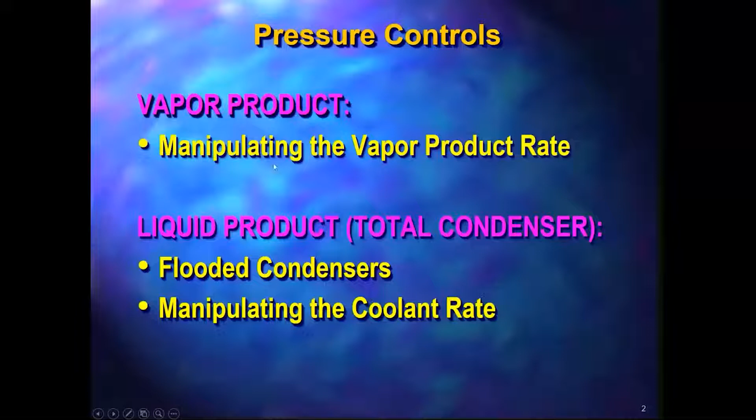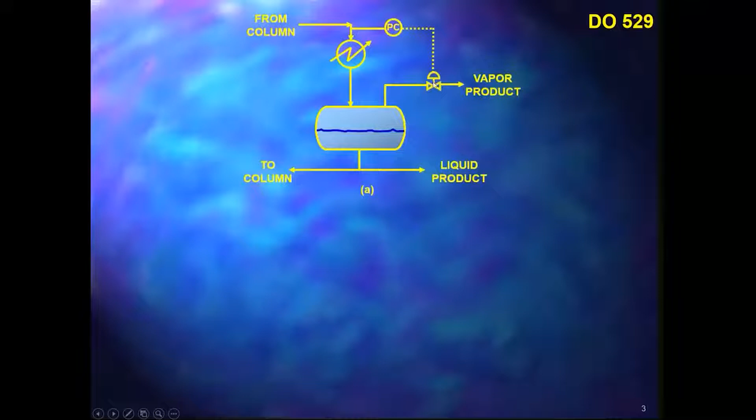Here's the simplest method. What you do is you have a control valve in the vapor product rate. Now, if you want more pressure in the column, you close that valve. When you close that valve, you keep a lot of the vapor in the column, and when you keep more vapor in the column, its pressure goes up. Conversely, if you want to reduce the pressure in the column, you open the valve that lets some of the vapor out, and the column pressure goes down.

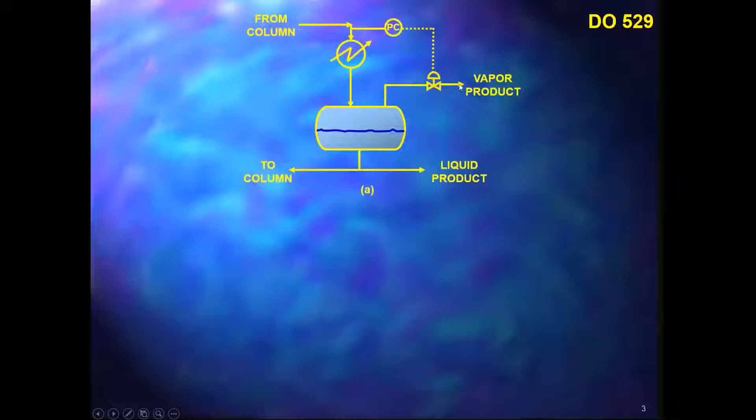Now, this method is suitable for pressure columns, for vacuum columns, especially if you've got a vacuum pump. Now, if you've got an ejector with a vacuum tower, very often we use an alternative, which instead of manipulating the vapor product rate, manipulates the spillback around the ejector.

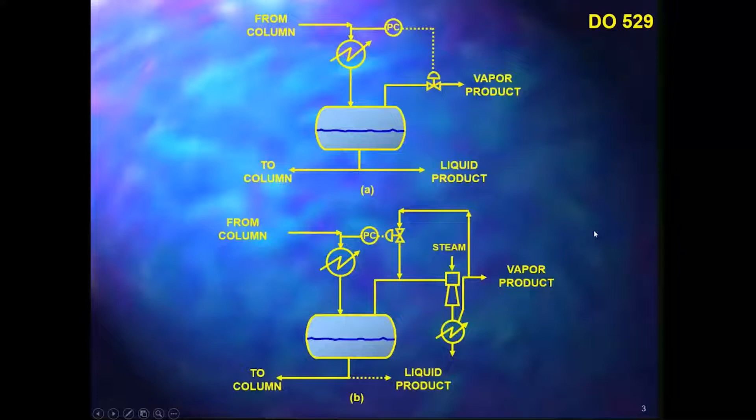Now, in many of our columns, the main product is liquid, but you still have a small amount of vapor vent stream coming out of the column. As long as you've got that vapor vent stream, you still control the pressure on the vapor vent stream. But in case you don't have enough vent gases, you can supplement it using nitrogen or fuel gas or some other inert gas that you put into the system. Now, all these three methods are good, fast, effective control methods as long as they are piped properly.

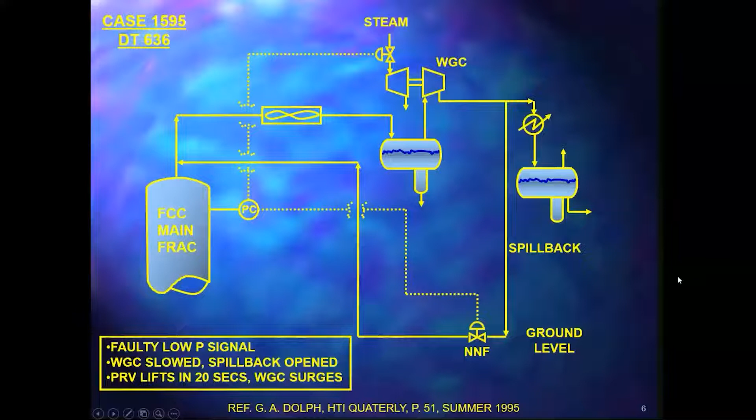Okay, so we're going to move to liquid products. And as we said, there's two main methods that we use when you've got liquid products, and one of them is the flooded condenser. And let me talk about that first.

Now, incidentally, you see a lot of page numbers out there. These page numbers refer to a couple of my books. DO stands for Distillation Operation. So if you want to read more about that, you will find it in Distillation Operation on page 530. Sometimes you see DT, the T stands for troubleshooting. That's another book, Distillation Troubleshooting, and the page number tells you where to look it up. In addition to that, when it comes to flooded condensers, there's an article that we wrote right on flooded condensers, and this article is referred to at the bottom out here.

Okay, now there's a lot of variations of this flooded condenser control scheme. And I'm going to start off with probably the most common variation, and the one that is really the basic variation. Now, what we do in this case is we insert a control valve in the condensate line from the condenser to the drum. And what we do is we keep a liquid level inside of that condenser. We flood some of the condenser area.

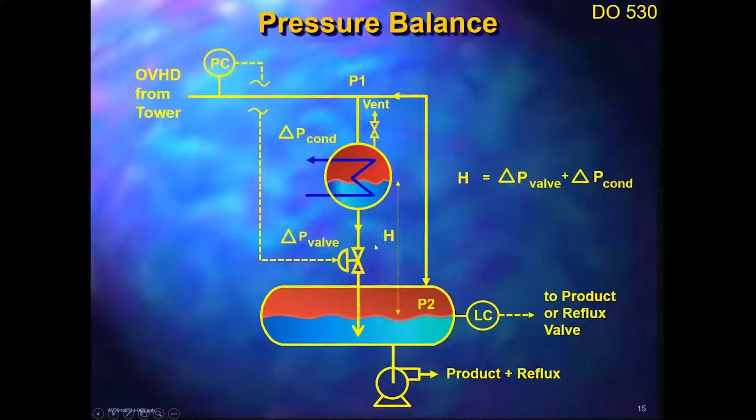Now, that means that if you've got a high pressure drop in the condenser, you may not have enough head to push the liquid down, which will bottleneck your capacity. Okay, to overcome that, what people do is they put a valve in here. And so now that gives you a bit more pressure drop that you can play with, and it essentially helps the liquid head that you've got out here.

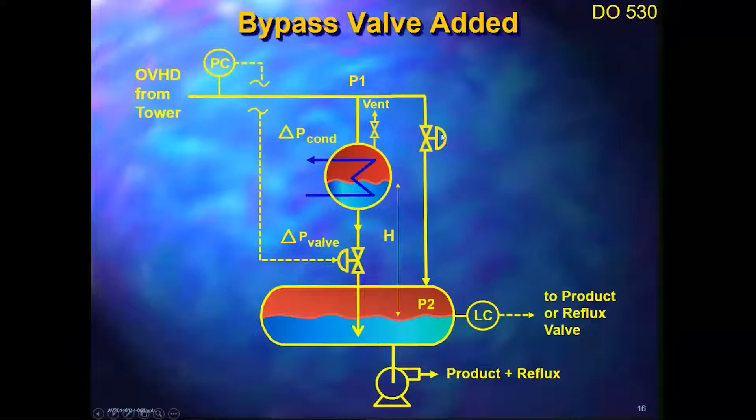Only question is, how are you going to control that valve? And conventional wisdom is to use a DP. And you'll see, usually they put a DP out there. Okay, only one problem with that. Those of you that follow the literature on the subject could have seen a paper that came out about 12 years ago by one of the experts in the field, a guy called Zach Friedman.

And what Friedman is saying is that he's seen this method more than 100 times and he's never seen it work. And he's got a good argument why it doesn't work too. He says basically the pressure control and the DPC fight each other. Okay, let's see why. Let's say the pressure in the column rises and you try to reduce it. What it will try to do here is open the valve, right? Open the valve to give you more condensation area and generate a flow downwards through that line.

Now, also when the pressure goes up, the DP goes up. And to reduce the DP, what will it do? Open this valve and send more vapor out here, which will go backwards through there and fight the first control action. Now, Friedman presents three solutions to that. The first two I'm not too excited about, but the third one is actually quite a good one. And I'll mention that in a minute.

Okay, but anyway, he says that he's never seen it work. Well, I can't say that I've seen it 100 times. I've seen it maybe 10 or 20 times. And most of the time it did work. But I thought, okay, I'll take seriously what he's saying. And I thought, hey, I've got people coming to my classes. Ask them the question, do you have this control system? And if they said yes, does it work?

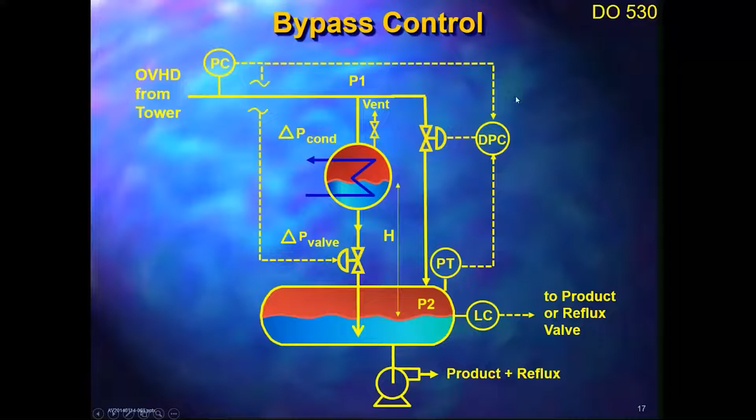One more aspect: in many of these systems, some of what condenses is water, usually a small amount, and you don't want to reflux the water back into the column because it can cause corrosion. To handle that, you include a device called a boot. The idea is that the boot collects the water that flows on the floor, runs it out, and you've got a control valve to take the water out.

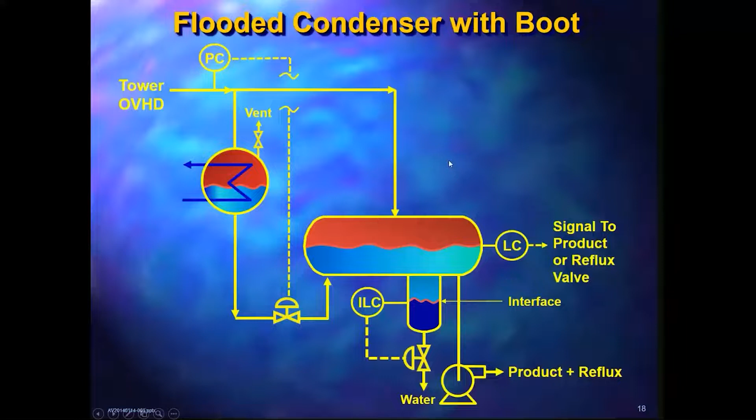Moving on. In many systems, instead of having the valve in the condensate line as shown in the last few slides, they put the control valve on the vapor line to the condenser. This is something many of the major licensors like to do, and very often they use that control system. From a control point of view, it's a beautiful control system. It actually augments the control action we took by flooding the condenser, through another mechanism: adjusting the condensing pressure out here.

If you want more pressure in the column, that means you want to condense less. To condense less, you can close the valve. Closing the valve raises the liquid level there, which helps you. But also, closing the valve reduces the condensation pressure, which reduces the condensation temperature, which reduces the delta T. So that's an additional effect. In a condenser, these two mechanisms work together. In a reboiler, not so much - they might tend to fight each other. But in a condenser, they don't; they tend to augment each other quite nicely.

Another advantage is that by condensing at a lower pressure out here, you also reduce subcooling, which is sometimes desirable, especially if there are NPSH problems in the pump. In other cases, subcooling is not desirable, and if it's not desirable, that system again offers some benefits.

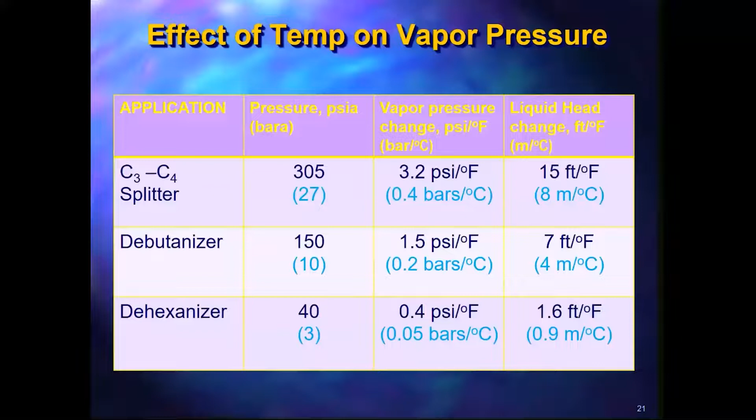So really, now forget about the bypass for a minute. Let's say there's no bypass. So this liquid in the condenser, the surface here, is at the condensing temperature, the vapor condensing temperature. But the liquid here is subcooled, so the vapor pressure in the drum is that of the subcooled liquid.

And that means it can push it up 280 feet. You can put the drum that far high in the air. And if the drum is only 15 feet above you, it will push the liquid right to the top. And we don't want to do that.

But to avoid that, what we do is we bleed some hot vapor. And that hot vapor heats up the surface. Now, the vapor pressure in the drum does not care what happens in the bulk liquid. It cares about what happens in the surface. And as long as you keep the surface hot, or fairly warm, then you can do whatever lifting you want. And that's the idea.

And so what we do is we manipulate the amount of hot vapor to essentially control the level of liquid in that exchanger.

Okay, so this is a flooded condenser method, just like all the others. Again, if you want more pressure in the column, the whole idea is you need to increase that liquid level there, right? Increase the liquid level. To increase the liquid level there, you open the valve, sends more hot vapor, which heats up the surface. It heats up the surface, then the vapor pressure of that liquid goes up, the pressure in the drum goes up, and it sends liquid to the condenser.

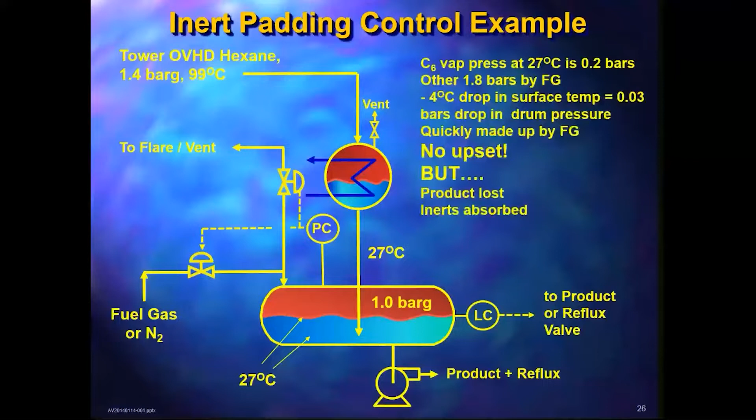I think we've had enough of these flooded condensers, so I want to skip a couple of slides and get into the coolant variation.

Here's one more method, in which we vary the coolant rate. In this case, we've got the pressure control controlling the cooling water. From a control point of view, it works nicely and is pretty straightforward. You want more pressure in the column, you reduce the cooling water. Want less pressure, you increase the cooling water.

Okay, three problems with it. Number one, the minute you close that valve, you reduce the velocity in the cooling water tubes, which gives you accelerated fouling and accelerated corrosion. Number two, when you close that valve, you increase the outlet temperature in the cooling water, which again increases your fouling and increases your corrosion. And number three, control valves used in cooling water are usually butterflies, which are very often oversized, so you end up controlling between 5% and 7% open. Okay, but other than that, it's good.

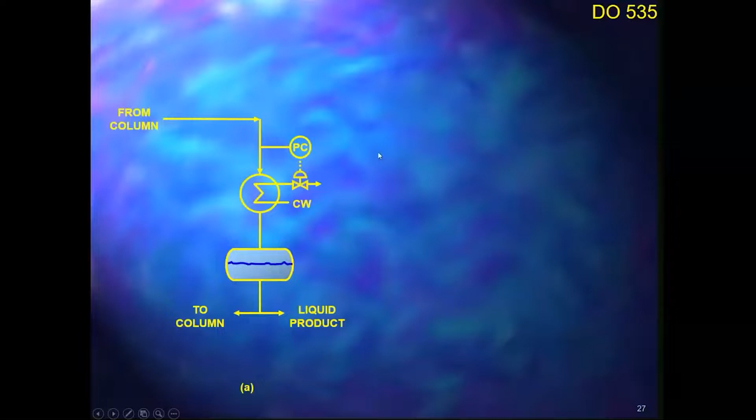But sometimes you might say, okay, this is our last choice, we don't want to use that. Sometimes you don't have a choice, sometimes you've got to use it — not so much for pressure control, but for temperature control.

We already mentioned the situation where the main product is liquid, and there's also a bit of vent gas out there. Normally we can just have the cooling water going flat out, but there are situations where we cannot. For example, in an ethanol column, they had ethanol as the liquid product and were also venting some carbon dioxide. If the temperature gets too cold, the carbon dioxide gets absorbed into the ethanol, making it off spec, so you need to keep the temperature warmer. But you don't want it too warm either, because then ethanol goes into the vent gas. So you really need to do temperature control.

The only problem is you run out of levers to pull — the only lever you've got available is that, and that's why you need to do it. As I said, not so much for pressure control, but mainly for temperature control.

That can generate another problem, which I want to demonstrate with the next case. This one was published a long time ago. The unique thing about it is the column overhead temperature was 120 degrees C. The drum was vented into an atmospheric header, so really it was pressure control without a valve, because it was riding on the pressure in the vent header — essentially that's the pressure control there.

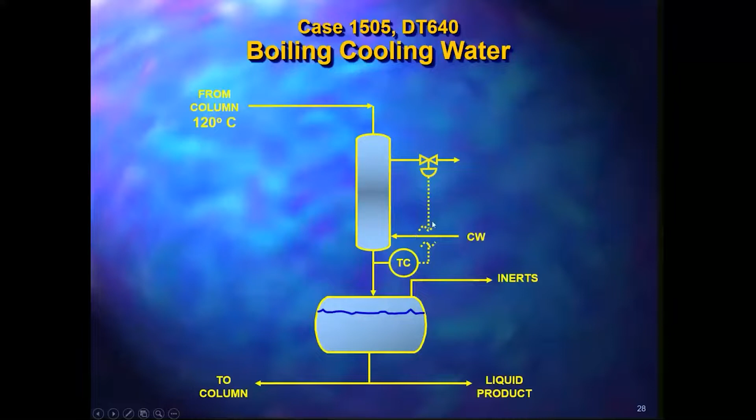Okay. Now, if you've got an air cooler, life is a lot easier. Because out here you can control the pressure or the temperature, and again, more for temperature than pressure, by the speed of the motor if you've got a variable speed fan, or the pitch of the blades otherwise. And these are good and effective methods, except they might get a bit of a bump every time you get a thunderstorm or something like that, but people live with it.

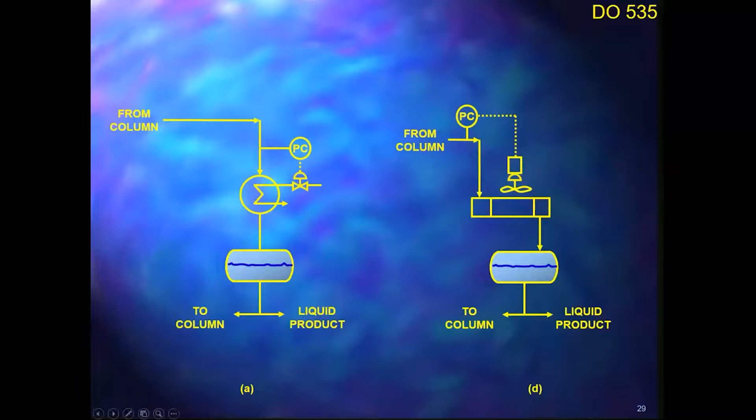If you've got refrigeration, changing the coolant is the standard way of doing it. Now, in this case, you essentially control the refrigerant level in that kettle. So if you want to get more pressure, you lower the level of refrigerant in the kettle, which cuts back on the refrigerant flow. And as a result, you get less condensation.

If you want to condense more, in other words, to lower the pressure in the column, you open the valve, raise the level, more refrigerant, and the pressure goes down. Again, very straightforward, a bit slow, but energy efficient. And because of that, whenever you see refrigerated columns, almost always you use this method.

Okay, and one more method I do want to mention. Now, back to the cooling water. One thing with the cooling water we mentioned before is that the low velocities cause the fouling and the corrosion. And that is a bigger factor than the warmer temperatures. And one way of overcoming that is by using a booster pump, just like that.

Okay, so what happens is you recycle some of the cooling water back into the exchangers. You always keep the velocities up high. And this is kind of nice. And now there's lots of variations of this method. The one I'm showing here is my favorite and became my favorite after I was taught that by a gentleman called Richardson, who used to be the control expert for Union Carbide in the old days when we had Union Carbide.

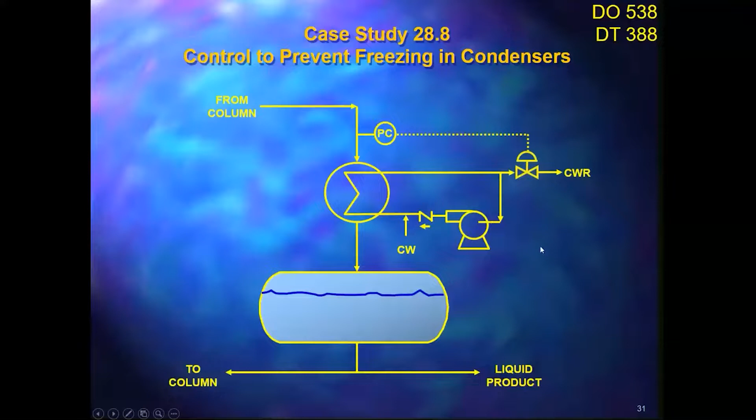Okay, one more method here. Now, until now, we talked about keeping a tight pressure control in the column. We said how important it is. For the very last slide, I'm going to turn the tables. I'm going to talk about floating pressure. Why would somebody want to float the pressure? And the reason for that is that a lot of the time, what really determines the pressure in the column is the air or the cooling water.

Well, the air and the cooling water are hot during summer, but they're cold during wintertime. So during wintertime, you can operate at a lower pressure. If you can operate at a lower pressure, you can reduce your reflux, your reboil, you got better volatility. And that's a big optimizer. Okay. And so a lot of people do it manually. The operators do it. What happens during winter? They run the column at lower pressure than during summertime, and that's it.

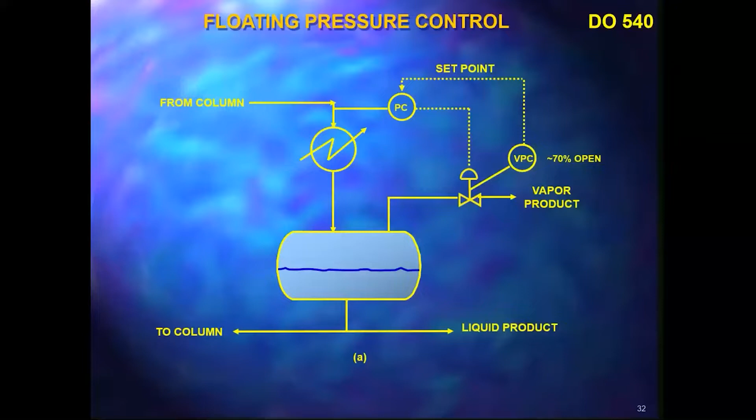So for our first question, back in one of the very first examples you had, Henry, there was a question about the control valve at grade. And so the question is, would tracing the line provide any benefit, or do you have to move the valve? Benefit, definitely. But it's going to be a shortcut solution, just like any other shortcuts. If you get some entrainment out there, it's not going to do you any good. But from atmospheric condensation, yes, it's going to help you against that. So it's definitely going to give you some benefit.

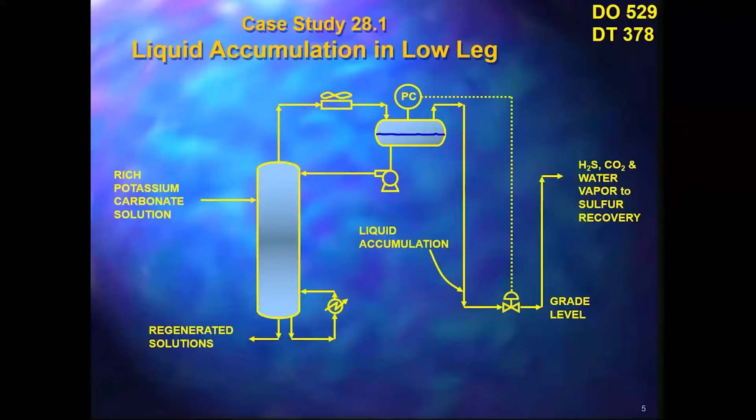There's other shortcut solutions. You can have a pumping trap out there or something like that. But obviously, the best thing, what we would definitely recommend, is to put the valve up high. But as I said, when we talk about this method out here, this one's a bit more difficult. You talk about big lines because they're using these big lines also for startup and stuff like that. So these are big lines, and sometimes you really have to have them at grade. Tracing might not be good enough for that. But the pumping trap and the steam trapping of that is definitely a good idea in this case.

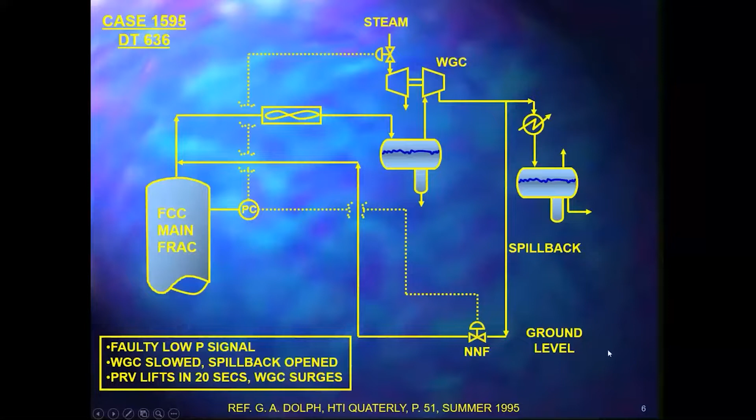Thank you, Henry. So next, we had a question. Can you comment on good practices for startup of a flooded condenser? Well, again, it depends on the system. I have not seen the startup of a flooded condenser to be a problem at any time. Initially, you just generate a little bit of liquid out there, get the level up in the drum, and once you get the level up in the drum, the whole thing is going to start working.

The one thing is, as long as you don't run into too much subcooling. You might want to cut back on cooling during that startup to make sure that you don't get too much subcooling out there. But as long as you configure it the right way, that should not be much of an issue. The other thing, if you are concerned, fill the drum up with liquid to start off with, and then you've got that line sealed. Once the line is sealed, then you don't have to worry about the very rapid condensation that can happen otherwise.

Thank you. For a flooded drum, can you not include an equalization line to the condenser and use it as a continuous vent system for non-condensables separated in the liquid-full drum? Run it by me again. For a flooded drum, yes. Can you not include an equalization line to the condenser? And there's no equalization line in that case. You do not need one. Okay, but could you include it then? Could you include it? Yeah.

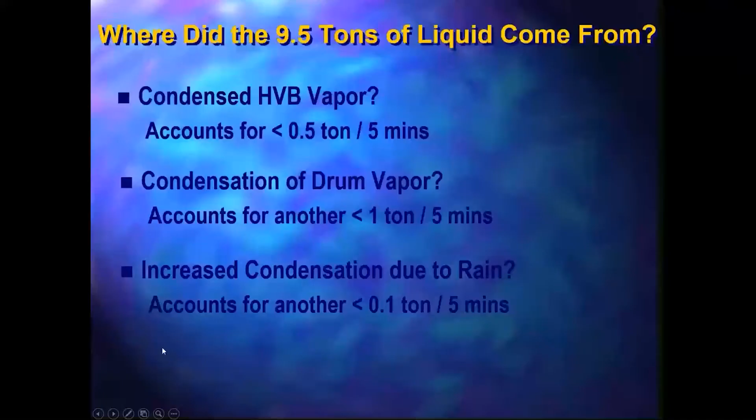If you look at my paper on flooded condensers, you'll find the reference to a paper by Mani. And really, if you want to talk about flooded drums and get a good understanding of the hydraulics, take a look at it, because there's a lot of complicated hydraulics in that. So before you do any kind of lines out there, take a close look at Mani's papers. M-A-N-I, that's the way he spells his name. It really was a classic. Well, thank you, Henry. Okay. I think they will do so.

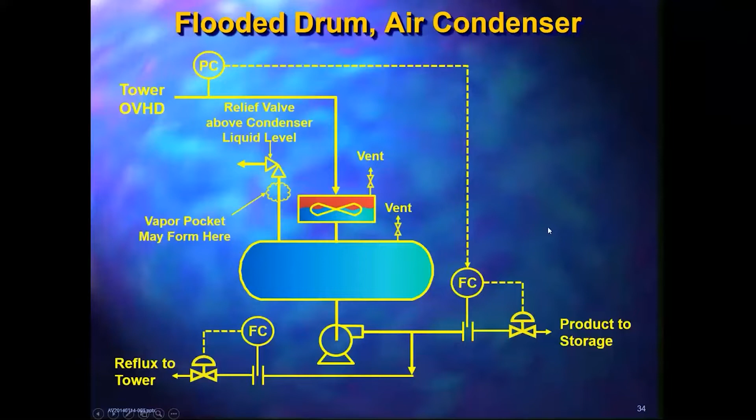Thank you. So what are your thoughts about annotating PFDs with no pockets or self-draining as opposed to waiting until P&IDs are done? Absolutely necessary. Let me tell you a little anecdote here.

You know, believe it or not, remember when I told you that system is a big no-no? I've designed a system like that. That was before I joined Fluor, but it's nothing to do with the engineering contractor that I worked with. It was something to do with me. I take full responsibility. And in fact, well, I didn't design it like that. I designed it like this, right? But not exactly. I didn't have all this. I didn't have that valve. But essentially, I designed that.

The liquid was going to the liquid. The vapor was going to the vapor. I did the PFD on that one. I did the P&ID. At that time I was a process engineer with some background in distillation. It was a naphtha splitter. And we finished, then the client came, reviewed, everything was okay. They made a few changes and we just went ahead.

And the next time I hear about it was a year later from the field. Hey, we can't keep a steady pressure in the column. I traveled to the field, take one look at it, and say, wait a minute, that's not how I designed it. What happened? Well, very often in engineering companies, the process engineers will do the P&IDs, and then the client reviews it. Once we pass the review, that goes to the pipers. And then the pipers do it their way.

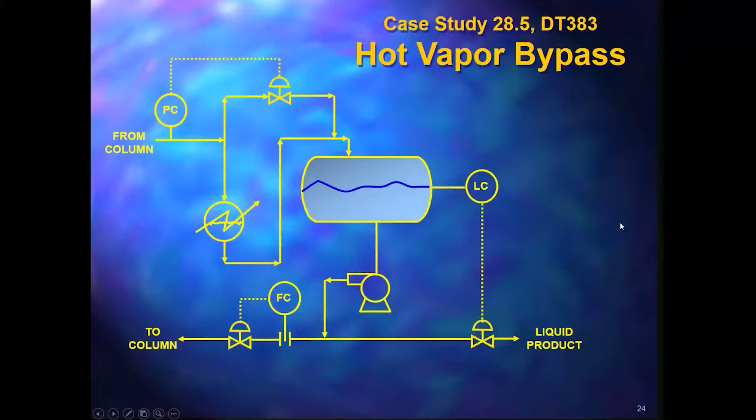Okay. For the condensers at grade, the hot vapor bypass, which was slide 24. Could you comment on an appropriate sizing basis for the rate through the hot vapor bypass valve? Yeah. The way to size that valve is consider how much vapor you need on a cold winter's day, because the biggest heat sink you've got is the subcooling, but even more so the ambient conditions. People don't like to insulate these drums because of external corrosion concerns. If the drum is insulated, that's really nice. But if not, think cold, rainy day in winter. At that time, you're going to get as much condensation as you're going to get.

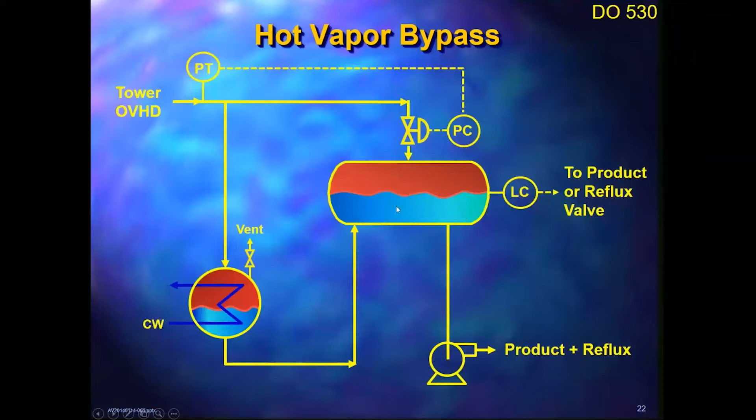And you need to be able to put enough hot vapor out there to counter this plus the travel of cold coming up. But what's very important is to make sure that the cold does not freely get up there. In other words, that you don't disturb that surface, because the minute you disturb the surface, you need a lot more vapor through that bypass.

And in that case I mentioned with Valero, it was incredible the amount of vapor it needed, because it was lifting that cold liquid to the surface. It opened the valve from about 5,000 pounds per hour to about 30,000 pounds per hour, and still couldn't keep up with it. So the key is this. Then all you have to worry about is a cold winter's day and counter that, maybe put an over design factor on that, and you still end up with a valve that's not very big.

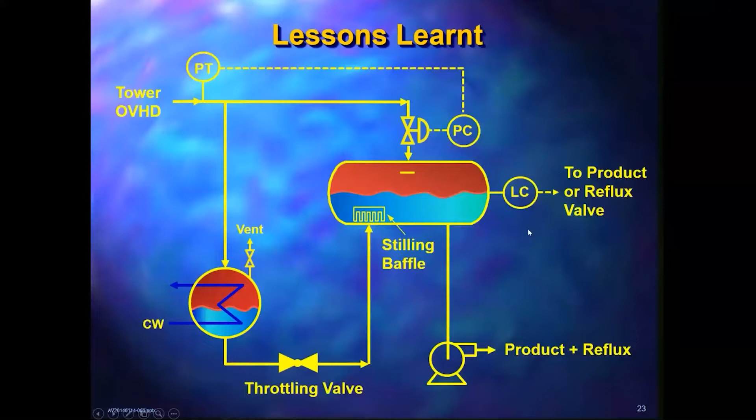Thank you, Henry. So is the vent location important in condensers due to carbonic acid concerns? Well, among other things, yeah, absolutely. Not just carbonic acid, it's just being able to vent the condensers. If you can't vent the condensers, you're going to inert blanket the condenser. You're going to lose heat transfer. So it's very important.

Now, the good practice is to always put the vent in the place where the inerts accumulate. So just look at a condenser and look for the place where they're going to accumulate. It's usually going to be on the top, but let's say if the entrance is out here, the vent is going to be at the end of the condenser. Now, if it comes in the middle of the condenser, you need a vent on each side. If it comes at one end of the condenser and comes out the other, then you only need a vent on one side. But whatever it is, look for the place where they're going to concentrate and follow that.

And there's a very simple, very good technique that I would like to recommend to you. Once you look at the physical arrangement of the condenser, the drawing, whatever, imagine that you are a non-condensable molecule traveling through the condenser. Which way will you go? Go to the place where you're going to go and put the vent right there.

Okay. Thank you. So what about designing a hot vapor bypass while controlling the cooling water? What is the sizing basis of a hot vapor bypass and the suggested or typical control scheme? Okay, the two don't usually go together. If you want to use the cooling water control that we mentioned before, like this, that is only suitable when you've got a vent gas.

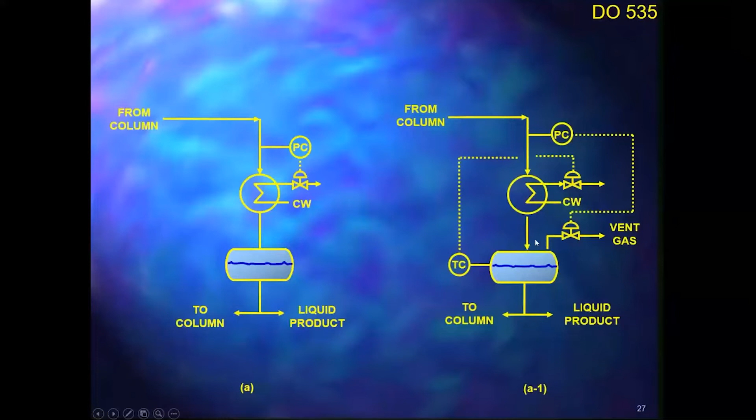And if you've got a vent gas, you don't want a hot vapor bypass. Hot vapor bypass is only for total condensing. So I would not marry the two of them together. It's either or. If you've got total condensing, hot vapor bypass is definitely an option. But the minute you've got some vent gas, hot vapor bypass is not a good option.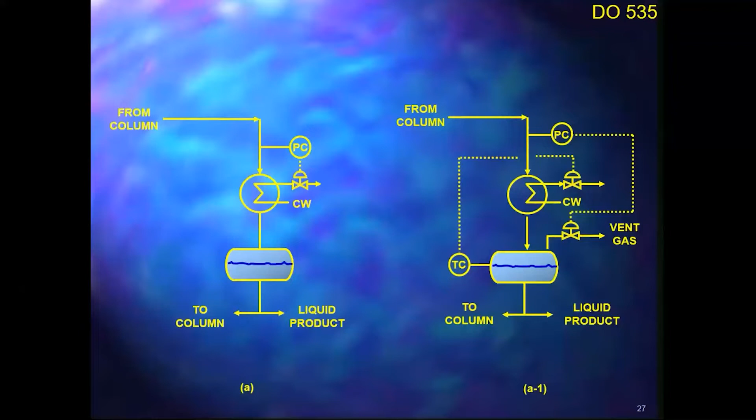Thank you. So Henry, do you ever see pressure control via dynamic tray elements and sensors along the column? What do you mean by dynamic? The answer is no. The pressure control is usually either at the top of the column, sometimes in the reflux drum, depending. If the pressure drop between the column and the reflux drum is not variable, you can put it on the reflux drum. Some people frown on it,

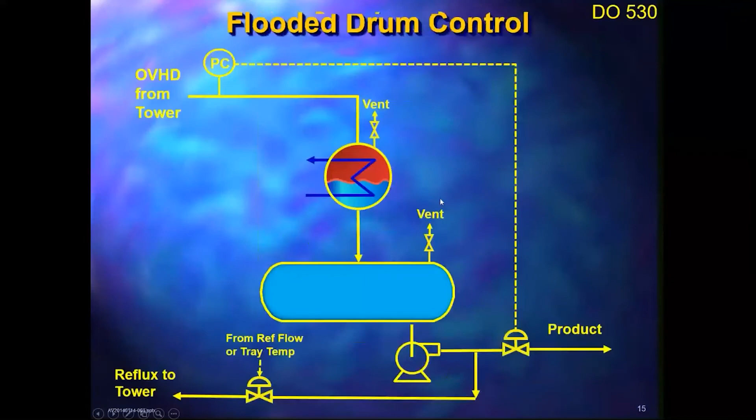but in some cases it's actually used, for example, going back to this system out there. That is a very common one for pressure. This one is very commonly controlled from the drum because the vent gas and the inerts come into here, they don't come upstream. But usually with something like that, you design it for not a variable pressure drop, so the pressure in the column tracks the one in the drum. So in this case, yes, but most of the time the good practice is to control it from the column rather than from the drum, and especially important if that line is undersized.

Now, incidentally, if you've got a system like that, that line needs to be sized for self-venting flow, because you're going to get some vapor and some liquid. You don't want to choke that line. So it needs to be sized big enough for that, and then you can put the pressure control in the drum. If that line is not sized for self-venting flow, you can have liquid backing up, and you might have some fluctuations. But I don't have any experience with pressure control from various points in the column. So it's either the top of the column, the overhead line, or the drum.

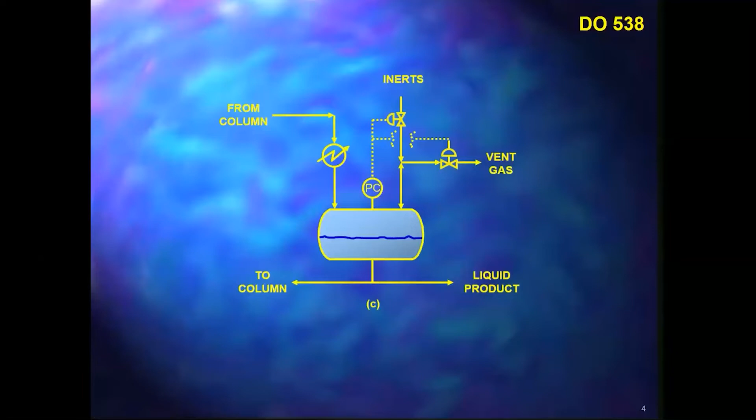Thank you. So with a higher degree of subcooling in flooded condensers, the internal reflux in the column does affect column pressure and the traffic inside the column. Have you seen any issues with that in distillation columns? And we're talking about straight distillation. Whenever you've got subcooled liquid, as soon as it gets into the column, it will condense some of the vapor, and the internal reflux is going to be higher than the external reflux.

I've seen problems when you've got some variability in it. And one thing that people do is what they call an internal reflux control. Essentially, instead of controlling on the external reflux, they control on the internal reflux. And you might say, well, what do they do?

Do they put an orifice plate inside the column? The answer is no. What they do is a calculation.

You take the flow rate of the reflux, and as it gets into the column, the subcooled reflux will condense some of the vapor and come to equilibrium. You can calculate how much heat it needs to reach the boiling point, which is the column overhead temperature minus the subcooled temperature, using the heat capacity and flow rate. Divide by the latent heat and you know how much vapor it will condense when it comes into the column. You add that to the reflux, and this is your internal reflux control. When you do that, it can smooth a lot of fluctuations.

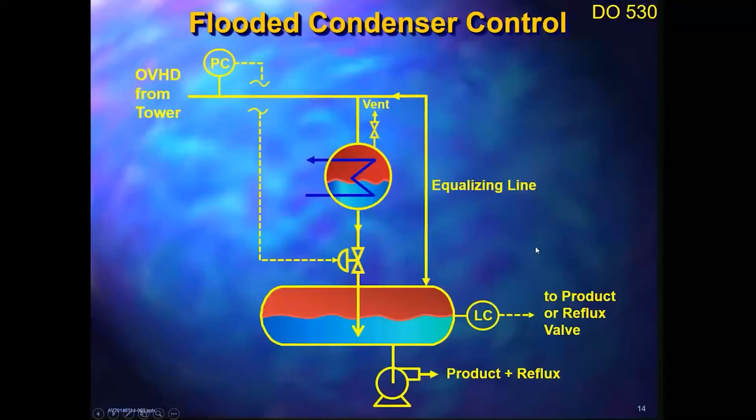Also with packings, it could be a problem too, because it might lead to some maldistribution. But other than that, in these cases, you might want to go with that control system we mentioned before that reduces your subcooling. Normally, though, I'd say all these cases I mentioned are exceptions.

Okay Henry, we have time for probably just one more question. Staying with the flooded condenser, would a seal leg in the drain line from a flooded condenser work?

That is something that's very commonly done when you don't have a drum. This is something you do in specialty chemicals a lot, with that seal leg exactly - you don't have a drum, you don't have a pump, that's how you eliminate the drum. So the answer is yes, but it's usually not very suitable for large scale equipment. It's more suitable for smaller operations, which is very typical of specialty chemicals. Again, it needs to be engineered properly, and that's another story.